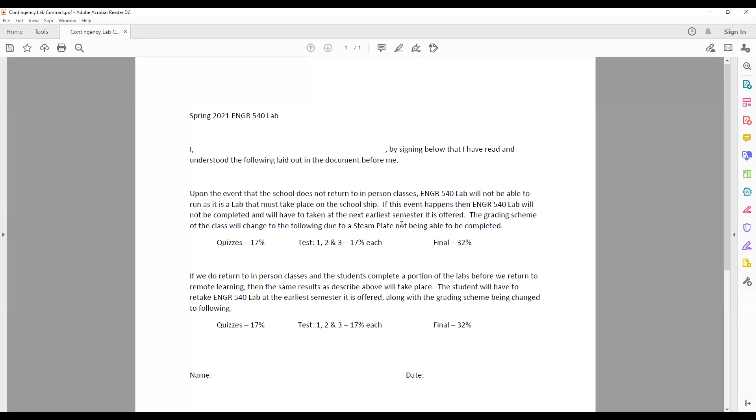Understood? Yes? All right, good. Feedback to me is appreciated - staring heads is just kind of odd.

All right, let's move on with the class. Minimize that. Open this.

All right. Any questions before we begin?

Just a quick question regarding if we are in person. I know the lab is very shortly after the class, so for the class I imagine we have to show up in uniform. Are we going to have to put our boiler suits on in between transitioning? Basically, right after this class, you go to a 1 o'clock lab.

Yeah, if you go right from this class to lab, feel free to show up in a boiler suit. That's totally fine. We're not in the fort, there's no regulation on that. Show up in a boiler suit because there's no point for you guys to run back to your room to go to the ship. That's going to hinder learning. Just show up in a boiler suit, it's fine.

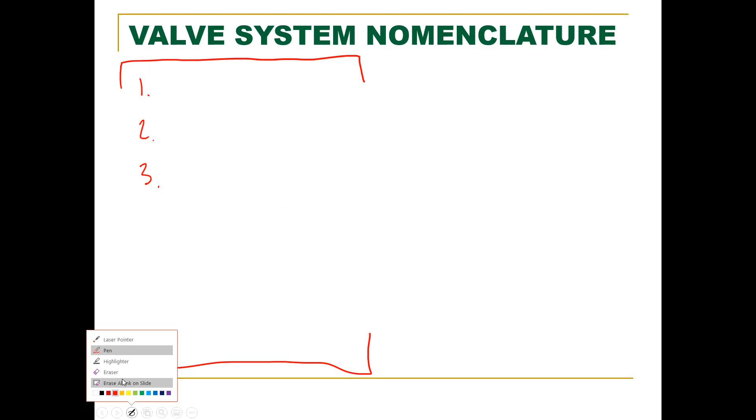So that way you always have the ability to use it. All right, it's going to be 10 questions, they're all going to be on Blackboard. I'm not using the lockdown browser. It's going to basically look like an exam. It's not going to be one at a time, it's going to be one after another. It's going to cover everything as far as valves is concerned. I think that's it. Oh, and it's all multiple choice, no writing. I don't want to read your writing, that takes too long to grade.

Everybody good? All right, good. So...

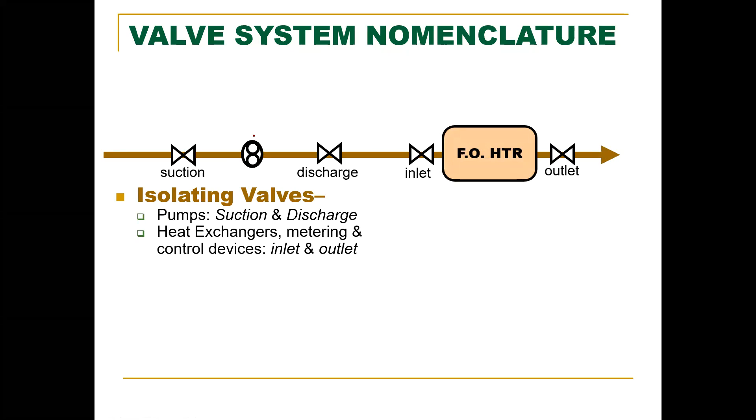Valve system nomenclature, just a quick review. We have our isolation valves. Remember what we're trying to do: if we had a perfect world, we wouldn't need valves except just to move flow. But in reality, pumps need servicing, fuel heaters need servicing, we need to be able to close and isolate and work around these things. So we have our isolation valves.

And we have our control valves. Same thing, we don't have a perfect world. We want to make sure that we have constant pressure. So this is our automation valve. We may not always have 50 PSI or whatever coming out of this pump. There may be discrepancies, there may be above, there may be below. It all depends on what's happening. How many burners are online? How much fuel is being utilized? It all depends, but we want to make sure we have that constant pressure.

If we look here, we have our automation valve. This is the symbol for one, as an automation valve or a control valve. By the way, I almost forgot to mention this: the valve PowerPoints are fully on the PowerPoints folder in Blackboard, so you've had access to that since Monday. We can see we have this dotted line coming all the way down and it terminates right here. That is the point in which we are sensing, that physical point this valve is taking sensing from. That's what that dotted line means.

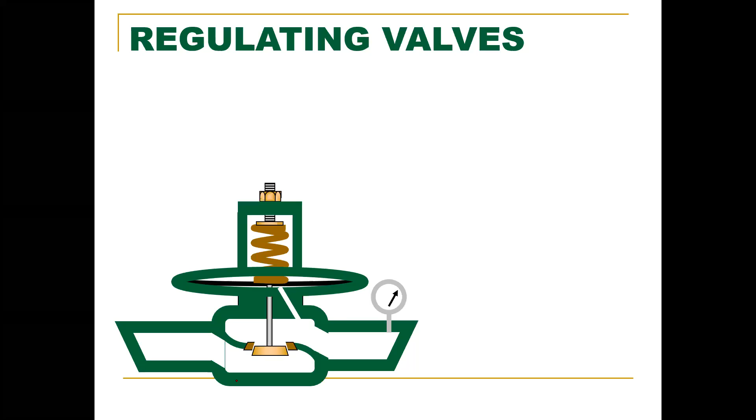So, regulating valves. We utilize regulating valves pretty much everywhere. This is an analog version of it. There are digital ones that use little electric motors or solenoids that we can fine tune, but this is an analog version. It does pretty much the exact same job, just in a very mechanical way.

So you can see here it says downstream pressure. Utilizing that term, that's new for some of us. If we're looking at a river, we're standing here on the edge of the bank. That's you. We have the flow of water going this way. We have our upstream and downstream.

So at point 1 and point 2, what is happening? At point 1, what is that considered? Is that upstream to you? Because remember, you're standing in this location. Yes, so upstream. Point number 1 is upstream right now, which makes point number 2 downstream, because it's in relationship to you. If you move the person and go for a walk upstream, now you're at this physical location, location A.

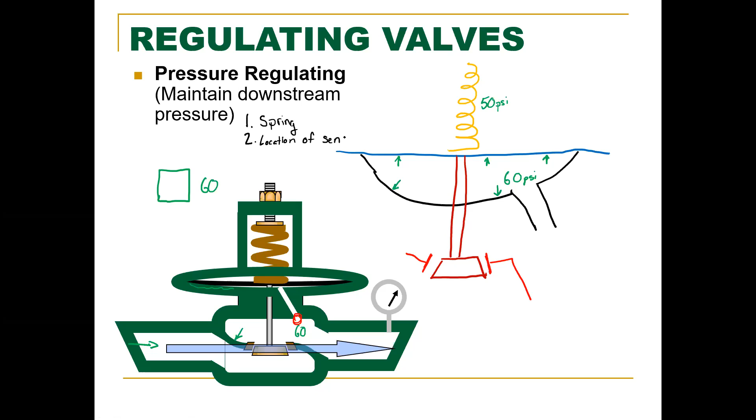So we have our spring, which way the spring is facing, on which side. We'll go into how it can change sides in a few minutes. The next thing is where it's taking its sensing from. So location of sensor. And 3 is which way the valve seats. Is it upward seating or downward seating? It will change what will happen.

And I just chose random numbers here. If you're on a test or a quiz or something, and this arises, what will happen to the valve? Is the valve going to close or open? Well, you can just assign numbers. Any random number. I'm using very large numbers. You can use negatives. You can do whatever you want.

But if you have 20 PSI down here and 60 PSI on that spring, what's going to win out on that battle? 60. 60, right? So 60 is going to push. It will overcome that 20 PSI and it will do what to the valve? It'll close it. Open it. It's going to open the valve because of which way it's seating. Remember, the flow is always going to come from below on these types of valves. And we can see our seat direction is this way. If that 60 PSI overcomes that 20 PSI, it's going to push open that valve.

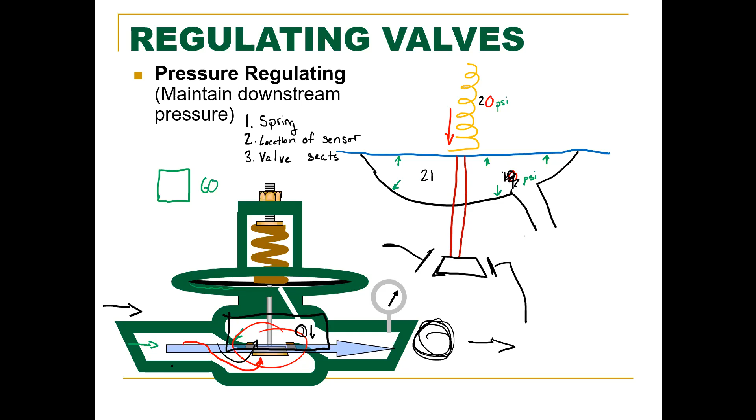So it only cares. The only information that goes to this valve is this point right in here. I know this is getting a little messy, so let's erase. It only cares about this point because that's where it's sensing, right here. But if we were to take this line and drag it all the way down, all the way over here on this pipe, well, it would only care about this spot right here, right? Because that's the only spot in the world that this has any input from. It has a set point, yes, by this spring. This spring is a set point.

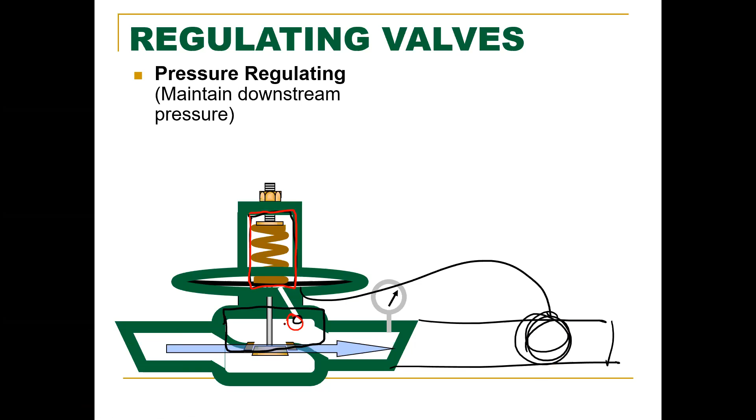But where its input from the system is only at the location. All right.

So I have a question. Yep. So the sensor part, is it the fluid or material that's going through it that's actually pushing up on the spring, or is it more like an electronic sensor or something? So we'll get into that later in the class, but in this instance, yes, it's whatever the fluid is. Okay. All right. It's the physical fluid going up into that area. Come on, just let me draw an arrow. There we go. All right.

So if we look here, we deciphered, yes, this is maintaining downstream pressure because we can easily see that fluid comes in from below. We could see where it's sensing. And it's maintaining downstream because in reference to this valve, this area over here is downstream of the valve. All right.

So the regulating pressure is the closing force. We could tell that by where it's acting. The pressure comes in and it's acting below this black baffle right here, this black gasket material. And telling by the way the valve seats, that's going to overcome the spring pressure and it will close it. And the spring is going to be the opening force. So when the spring pressure can overcome the pressure inside of where it's sensing, it will open up the valve.

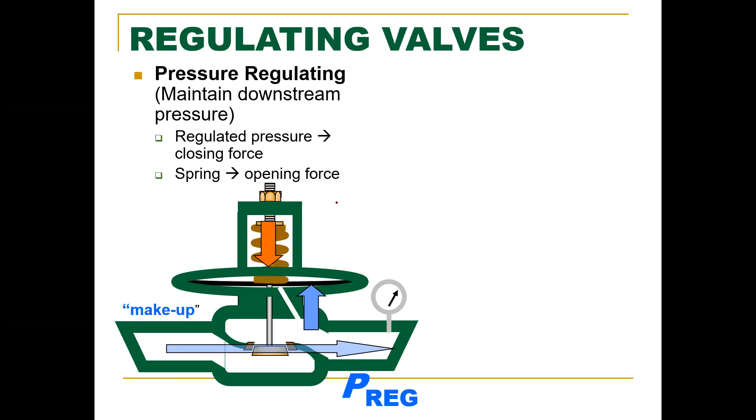I just have a quick question. Mhm. So obviously I see there's threaded rods and the nut, so that's how you would adjust spring tension, but how do you tell how much spring tension you have on? Do they have gauges or? So basically what happens is that you would have a valve, and that's a good question, by the way. Yes, you can see this has a nut right here. This is going to go up and down via how much force you apply to the spring. So every valve will have a range.

All right. So as other people have mentioned, this one is directly acting on what is happening inside of the system. So this will have a range from, say, 50 to 150 PSI. And as a designer, as an engineer who is in operations, you never want to hit these max and mins. You always just want to stay a little bit away from that. It'll give you that room because this may not be perfect.

So if this is somewhere up to 150 PSI, that means that this spring and the length of this nut in this area can handle and regulate between 150 and 50 PSI. So depending on how much force is brought upwards or downwards, or how tight or loose that nut is, you'll be able to go to 50 or 150 PSI. Knowing that, if you want to hit, let's say, 100, right in the middle,

the way I would do it, I would install it. We won't really have a gauge, but I would put that nut right at the middle. And then from there, we'd start up the system. You would basically bleed off the system. You would look at your pressure gauge and you would set it from there and try and dial it in perfect. All right. Okay.

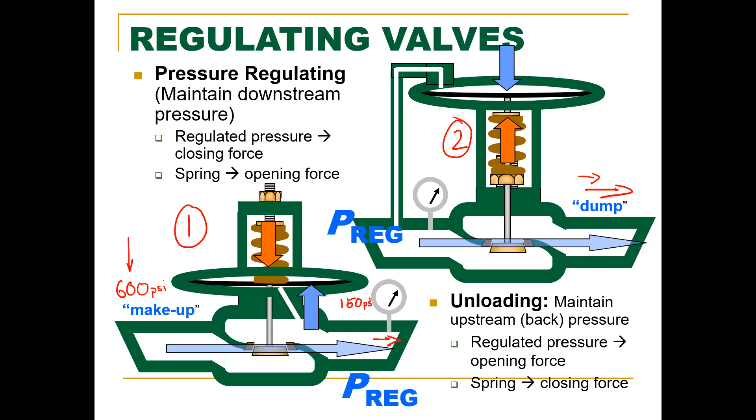All right. So can these work in conjunction? Like, can you have two of these set up, one behind the other or one in front of the other, for whatever reason? I mean, you can have it on two different. If there's a situation that needs it, there's no reason you can't have it, because it only matters what's happening at this point.

It's okay. Can you throttle these? Or would you want to? They are going to throttle themselves. They're not going to be fully open or fully closed. Okay. All right. So these will be a throttling valve where they might be at a certain point 25% open, 50% open, 100% open. All right.

So if you're starting up the system for the first time ever, well, let's stick with this. We have 600 pounds steam over here and we want 150 over here. If we're starting the system up for the first time, we're just starting to make pressure over here. So we start at 5 PSI, 10 PSI. I'm not going to bring you all the way through it, but we get all the way up to 600 PSI.

Well, as soon as we start to do this, what's happening over on this side? We have 150 PSI of what we want. So once we hit 600, this valve is going to basically close up over here until 150 drops below. Then we need to start adding more steam into it. All right. So as we're bringing that system up, this side will come up at the same rate as the 600 will come up until this side hits 150. All right.

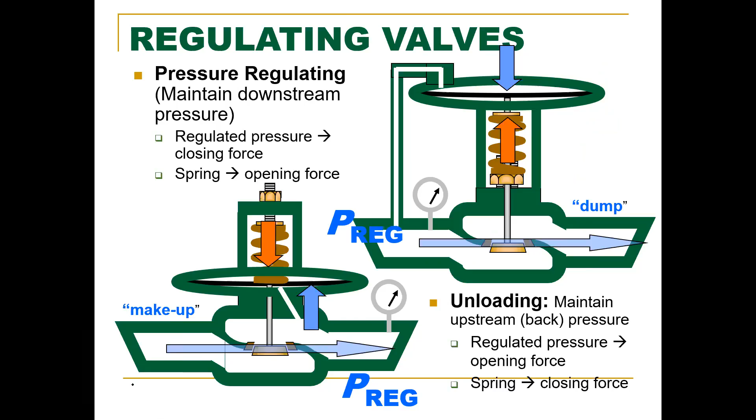All right. We use on our school ship some of the worst fuel you can get your hands on. It's literally one step above asphalt. All right. So we don't want that getting into the crevices of our regulating valves. It will not allow these valves to function really. So we use air. All right. And what happens is, as you can see here, we have two different types of air regulating valves.

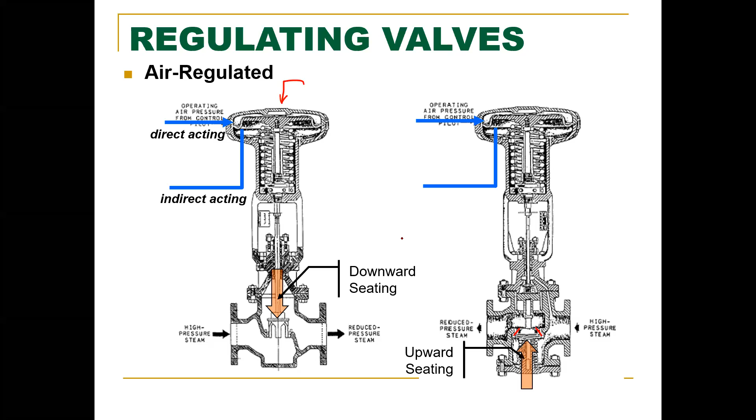This one is upward seating, so we can actually see it change. So the spot where it seats is right there and there on that angle. All right, so that's an example of these two things changed. All right, so a direct acting is coming in from above. And then we have indirect acting, which comes in from below. All right, so two different types of valves.

So we also have a fuel oil temperature regulating valve. So we utilize steam for our heater because it's a steamship. We have a lot of steam. Well, we want to heat up our fuel, all right, in order to make it move. All right. So we want to make sure we are constantly regulating the temperature.

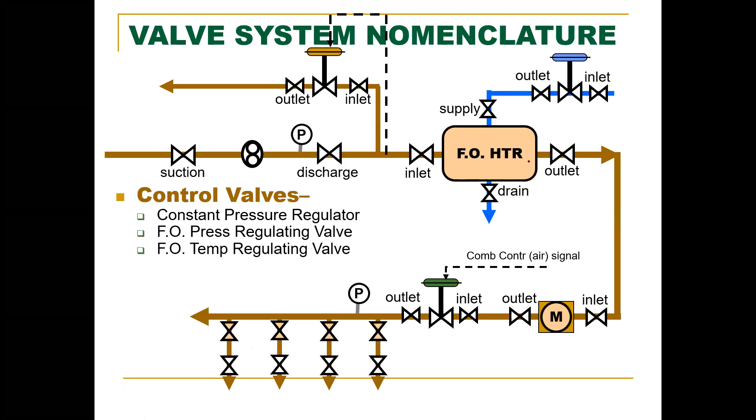Right here, we are taking a pressure reading. I'm not going to get into, nor am I going to expect you guys to know how that happens, that's for later on. This is going to take a controlled pressure reading off of it, and that is going to go into our control pilot valve. So our control pressure is going to go in, and this is our input.

We have an air supply that comes in. That air supply is compressed air. We have compressors on the ship that will only supply a certain amount of air to our air regulated control valves. So when you're using needle guns, or any sort of pneumatic air tools, that comes from a completely different air supply. We have a designated air supply that comes in.

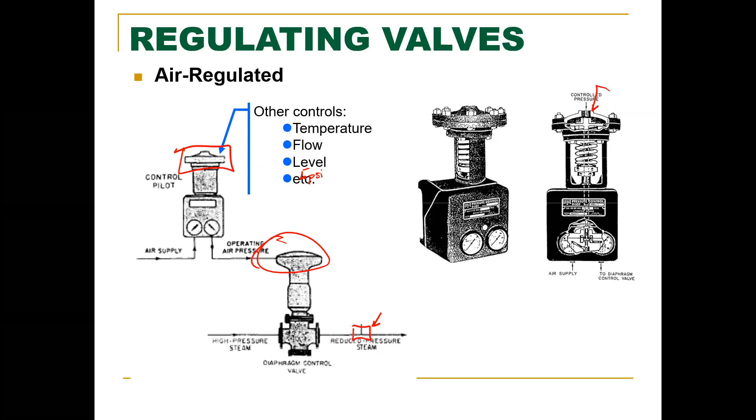So every instance it can change. Sometimes this might be just straight steam that comes into this control valve, this control pilot. Most of the time it's going to be some sort of a controlled pressure that comes off of our measuring device. But at the same time, you can also have things that come in and you would actually have true pressure coming in here. So both are true. Other things, like temperature, flow, level, so much can be put into that. If it's something that can be measured, we can turn it into an air signal.

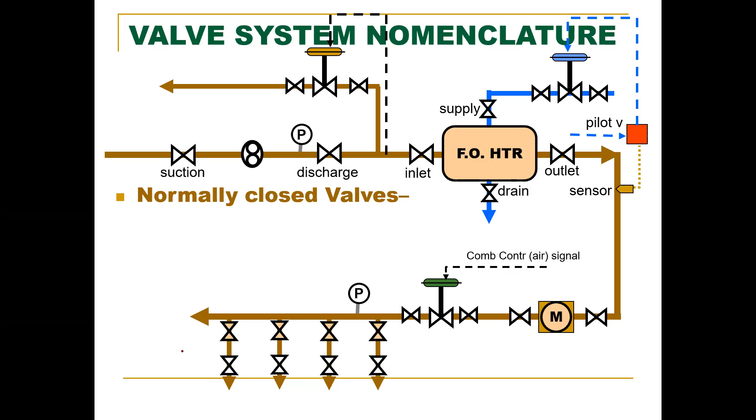That's our control valves. We have a couple of other different valves out there. We have a normally closed valve. That means in its everyday existence, it is closed. It only opens when a certain condition arises.

So that would be a relief valve. You would want a relief valve to be closed all the time. If that was on an air tank, you wouldn't want that thing just blowing air out, right? That would be counterproductive to what's going on. So you want that valve to normally be closed unless this certain condition happens. So same thing right here, this symbol represents a relief valve. The other way that I showed you guys the other day that can be drawn is that.

So that is our relief valve. We can see it's taking in from our pump and it goes into the relief valve. But notice on the other side of the relief valve, we have an arrow that draws back into the suction side of our pump. Why would we want to do that? Why wouldn't we just blow it out to the environment overboard? If it's a problem, why would we want it to go back into the system?

It's more efficient. What about fuel? Maybe you put it in the ocean. We wouldn't want to put it in the ocean, right? So what if we could use it? Think about you as an engineer, you come wandering over and you look down at this pump, and it just so happens that your relief valve is right at eye level. Then all of a sudden that pump was making some funny noise, so you look at it, and all of a sudden you get sprayed in the face with some hot fuel. Not good either, right? So, oops, geez.

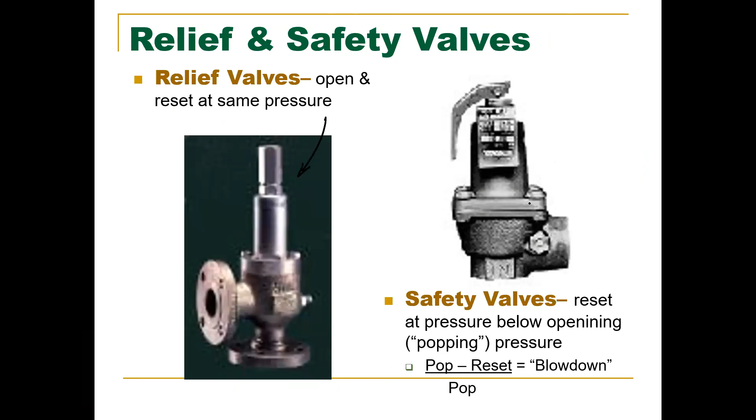We have two different pictures here. One is a relief valve. Remember, a relief valve opens and closes at the same pressure. And we have a safety valve. A safety valve will open at a certain pressure, and then it will close at a pressure below that set point. Now we have something called a bypass valve.

That just shows our efficiency and it goes to the company. We don't really care. But in reality, if we didn't have bypass valves, would we want a meter to shut down our ability to go across the ocean? We have a timeline. We have cargo that needs to get somewhere. Someone's Amazon package is on that ship. That's why we have bypass valves.

We can close our isolation valves, our input and output, our inlet and outlet to our meter. And we can open our bypass valve and now allow the flow of fuel to go around the meter, and we continue to steam. We can now service this meter. When the meter gets put back online and it's all fixed, we can close our bypass and open up our isolation valves.

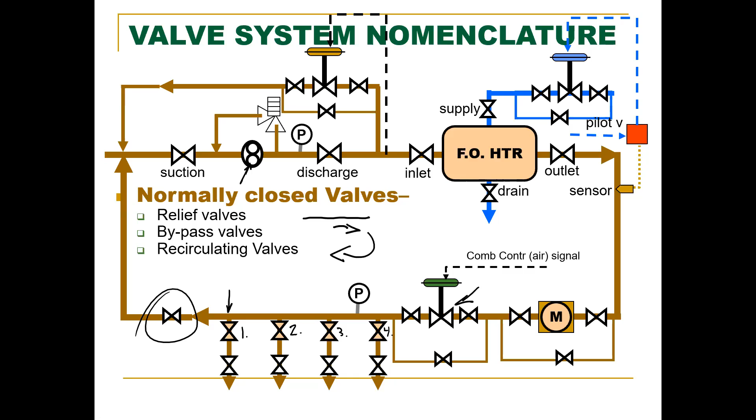It maintains a certain amount of fuel pressure, no matter how many burners we're going to be using.

For the relief valves, was it just normally closed and normally open, or were those going to be two separate things? Relief valves are always normally closed. Normally open will go into when we get into water making, but just know that does exist.

Any questions on valves? Are we going to have to know the symbols for the quiz, like all the different kinds of valves? I'm going to say no.

I am introducing the symbols for valves slowly, and in all other systems. I am going to be posting soon the standard symbol tracings that we all use. That's one of those things I always keep handy if you don't have them memorized. You're going to be expected to use those when you do tracings and things like that, and when we get into pumps, it's going to become very mandatory to know them. So it's not something you should know for the test, it's pretty much one of those things I can guarantee you'll know for life. If you're going to be in this industry, that's something you should definitely know.

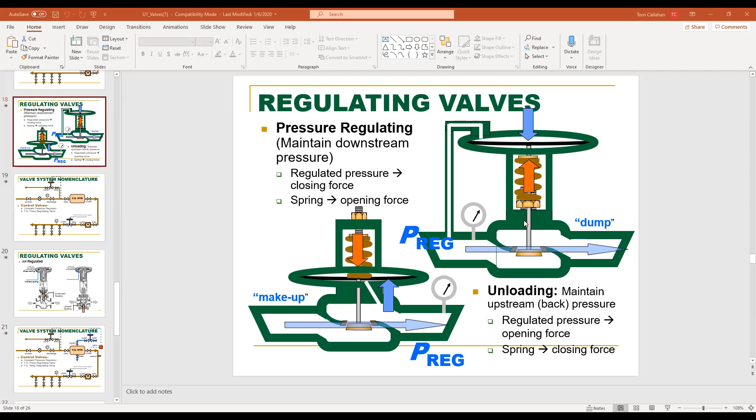Okay, and then it goes back down. So it goes up to the top here, and it's on that baffle, that black piece of gasket material right there. And it's going to be pushing downwards, and it will open up that valve. And the only thing that will close that valve is that spring. Oh, that is pushing upward. Exactly. Okay. All right, Professor. Thank you very much. No problem. Have a good one. You as well.